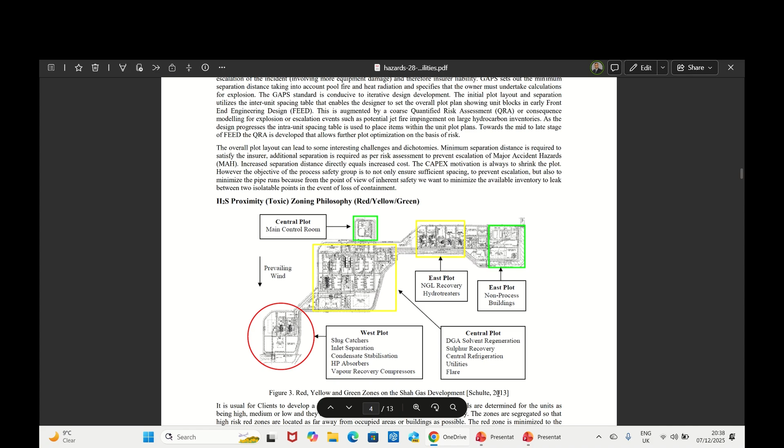So we will read through these sentences and then try to understand. It says that the Global Asset Protection Services, GAPS, used by the insurer, usually sets a minimum separation distance to be applied in the facility. The driver here is to minimize equipment damage and escalation of the incident, and therefore insurer liability. GAPS sets out a minimum separation distance, taking into account pool fire and heat radiation, as well as that the owner must undertake calculations for explosion.

So basically, this is the same thing I was talking to you guys about, that there are systems where they talk about minimum gaps, some 10 to 30 meters distances, and this one says that this is augmented by a quantified QRA or consequence modeling for explosion and/or escalation events such as potential jet fire impingement on a large hydrocarbon inventory.

As the design progresses, the intra-unit spacing table is used to place items within the unit plot plans. Towards the mid to late stage, the QRA is developed that allows further plot optimization on the basis of risk. So you can see that this talks about QRA keeping the distance away, and it talks about different aspects of QRA at different stages of engineering.

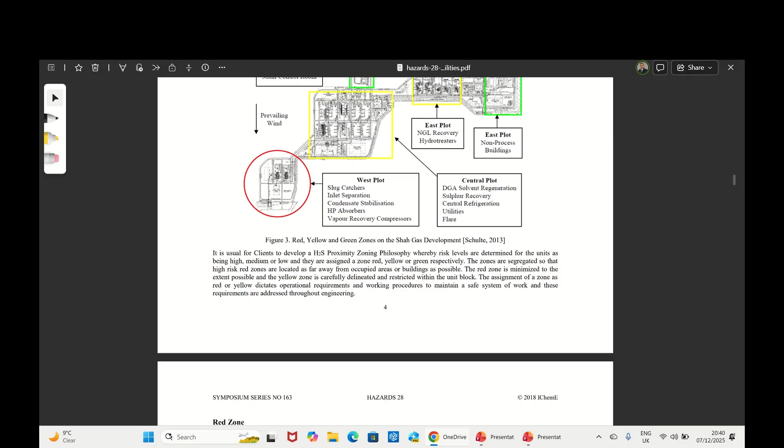So the following pages are talking about different zones, what is the meaning of each zone. So let's have a look at this aspect as well. It is usual for the client to develop a proximity zoning philosophy whereby risk levels are determined for the units as being high, medium, or low, as they are assigned the zone red, yellow, or green respectively.

The zones are segregated so that high risk red zones are located as far away from the occupied buildings as possible. The red zone is minimized to the extent possible, and the yellow zones are carefully delineated and restricted within the unit block. The assignment of the zone as red or yellow dictates operating requirements and working procedures to maintain a safe system of work, and these requirements are addressed throughout engineering.

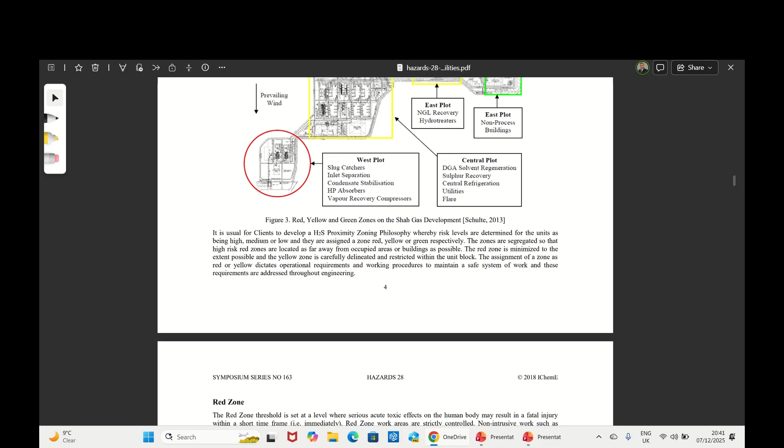So as it is clear, the prevailing winds are there, the proximity of H2S, and then accordingly you define the zones based on the hazardous conditions and the presence of hazardous material, which are red, yellow, and green.

So we just go through the red zone, what exactly it means, and then we will explore more aspects. A red zone threshold is a set level where serious acute toxic effects on the human body may result in fatal injury within a short time frame. Red zone work areas are strictly controlled. Non-intrusive work such as security and operator inspection may be conducted with a mandatory requirement for personnel to carry an H2S detector. So basically, these are the areas where high fatality can happen in case of exposure.

So, anyways, I am not going into all this breathing system and PPE required, but prima facie these are the zones where exposure can lead to the immediate death of the person. So that's why it is classified as a red zone.

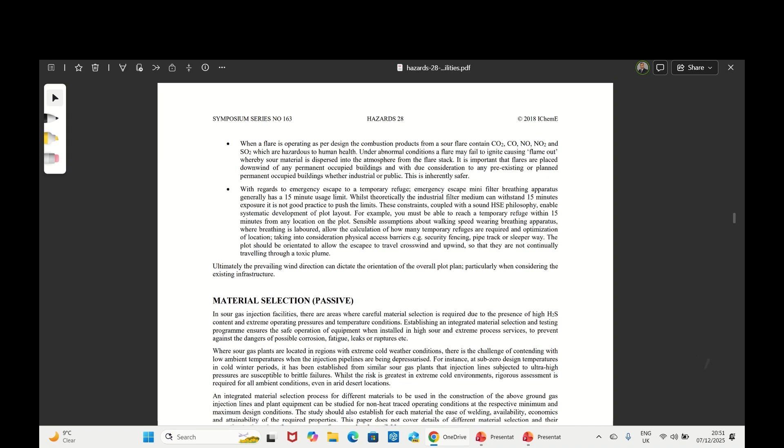So basically, I'm not going to detail this explanation, but what I understood is that the plot plan layout should be such that your emergency exit is in a location which is more approachable to the people who are working in the plant and who are in the control room or the buildings where the offices are.

Plus, the location of these buildings should be upwind and the flare should be downwind, so that in case of flame out or any other reason where the flare has extinguished, the dispersion takes place and the toxic gases are not in the periphery of the operating plant. They're dispersed away from the plant periphery or premises.

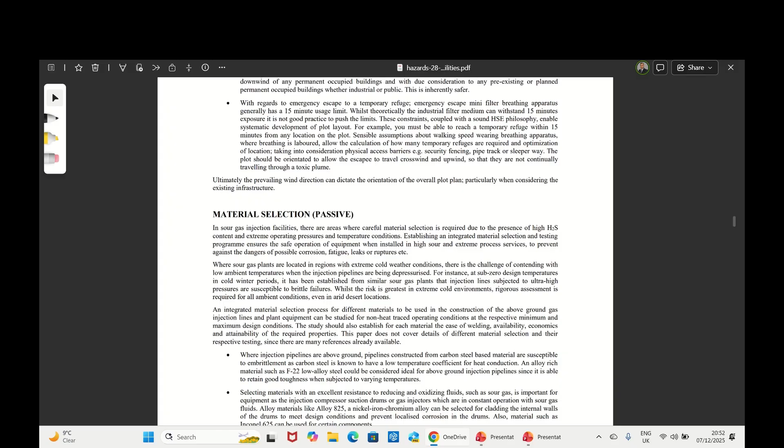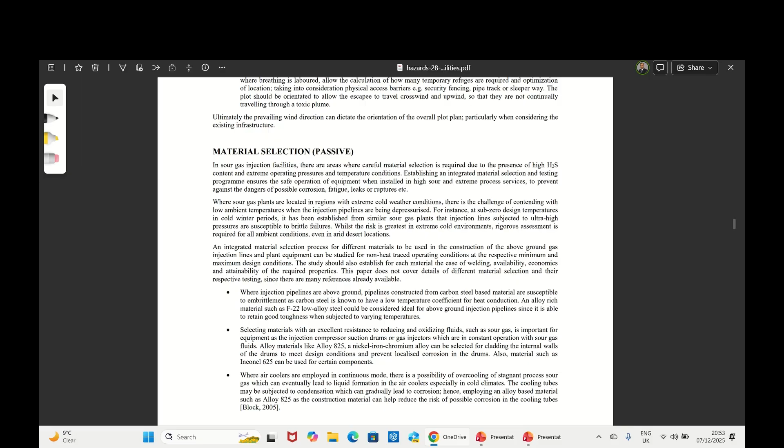So material selection is also a kind of passive inherently safe design, which means that you should follow a material which is compliant with sour service and which has proper coating. Suppose it is a sour facility, then we go for duplex or CS with some kind of coating for the equipment. So we will see in detail what it says. We will read this passage through, and then we will analyze it.

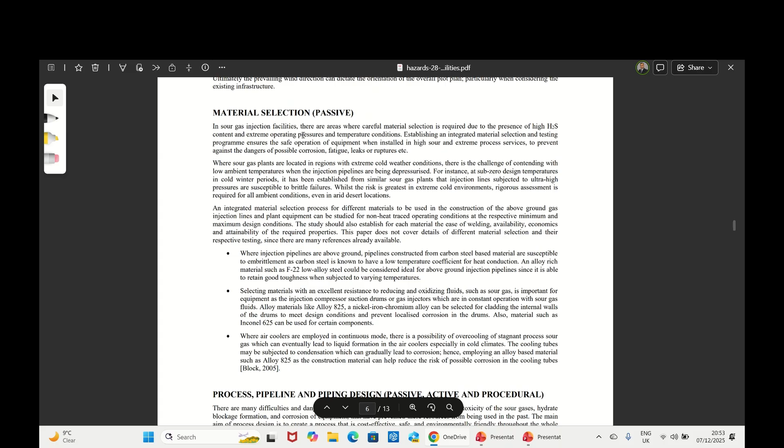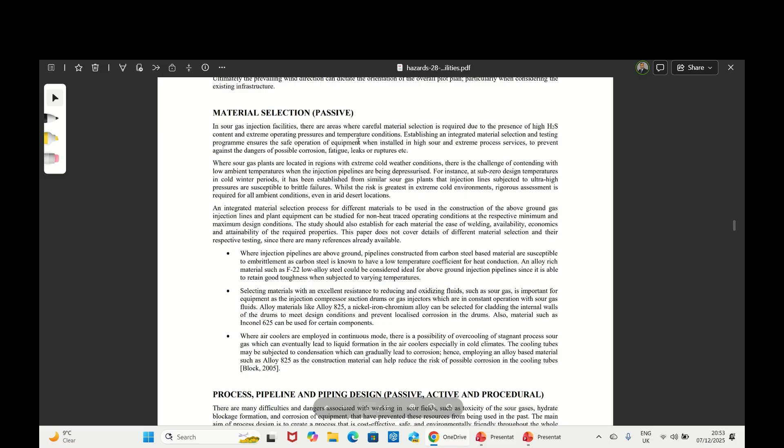Okay. What it says is that in a sour gas injection facility, there is an area where careful material selection is required due to the presence of high H2S content and extreme operating pressure and temperature conditions. Establishing an integrated material selection and testing program ensures safe operation, which is why I said just now that proper selection of material is required for the ultra sour or sour H2S concentration, which is done by the piping material guys to develop a piping material specification.

And what happens is aqueous H2S can create SSC, which is also called sulfide stress cracking, and hydrogen embrittlement, which is not good for SS material. So we go for duplex or some kind of epoxy-lined CS materials.

So let's go to some bullet points. What it says is that where the injection pipelines are above ground, pipelines constructed from carbon steel based material are susceptible to embrittlement, as carbon steel is known to have a low temperature coefficient for heat conduction, and alloy rich materials such as F22 low alloy steel should be considered ideal for above ground injection pipelines, which are able to retain good toughness when subject to varying temperature.

So one of the aspects very nicely explained is selecting material with excellent resistance to reducing and oxidizing fluid such as sour gas. It's important for equipment such as injection compressors, suction drums, and gas injectors, which are in constant operation with the sour gas fluid. Alloy material, nickel alloy, chrome alloy can be selected. So they are going for alloy material, then cladding of internal walls of the drums to meet design conditions and prevent localized corrosion of the drums. Also, materials such as Inconel 625 can be used for certain components. So very much they say that they're not going for SS, rather they're going for alloy material.

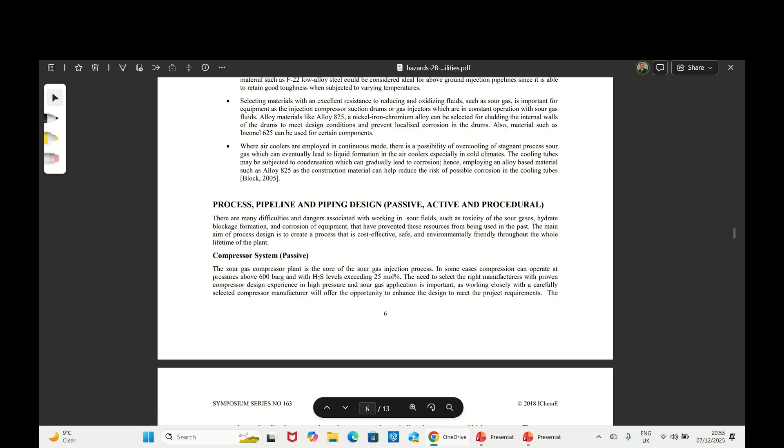Air coolers are employed in continuous mode. There is a possibility of overcooling of the process sour gas, which can eventually lead to liquid formation in the air coolers, especially in cold climates. The cooling tubes may be subjected to condensation, which can gradually lead to corrosion. Hence, employing an alloy-based material such as alloy 825 as a construction material can help reduce the risk of possible corrosion in the cooling tubes.

So you can see that it's very clear that a proper material selection diagram, or we call it MSD, should be developed in consultation with the process engineers, and they can tell us how much stress concentration is there. Accordingly, material can be selected.

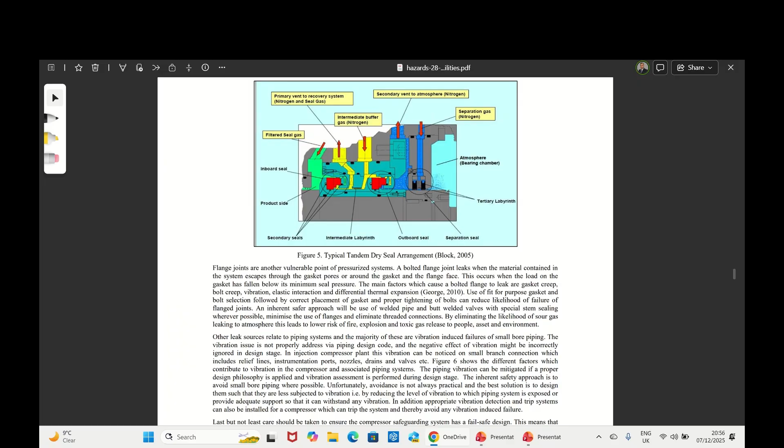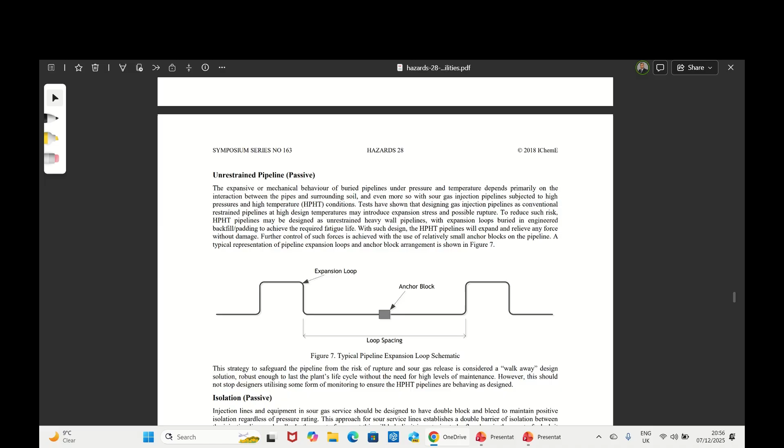So this section talks about process pipeline and piping design, passive, active, and procedural design, and we will dig into this one: compression system, which is passive, leak path minimization, passive, and it talks about compressor seal, then unrestrained pipeline, loop spacing, all passive; isolation, hard pipe venting, flaring, overpressure protection are active ones; hydrate and corrosion is active; enhanced smart pigging or pipeline inspection is procedural; moisture analysis and wet condition is procedural, breathing air system procedural.

And practicalities of achieving innovative safer design. We will come to this checklist and all these things slowly, and then we will read through the conclusion. So let's go back to a system where it explains some of the passive, active, procedural innovative safe design activities, and slowly we will try to understand this.

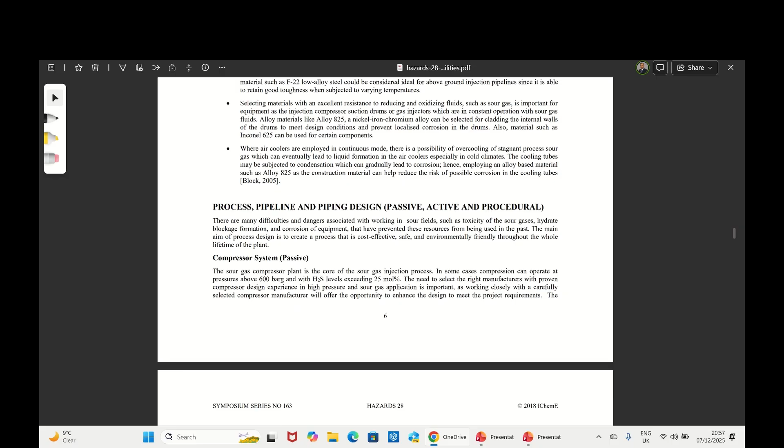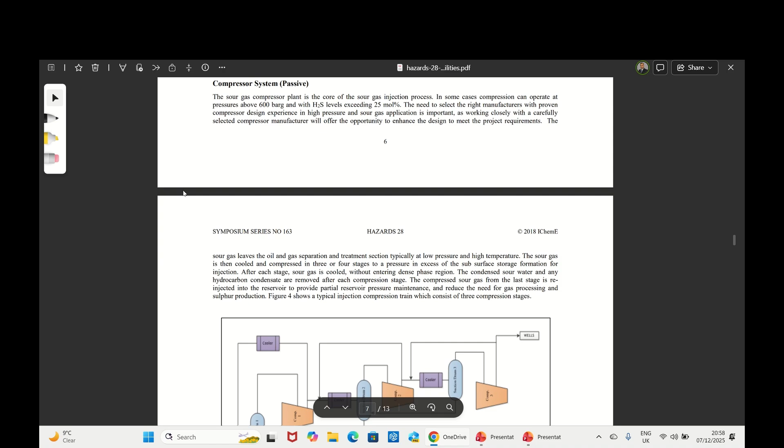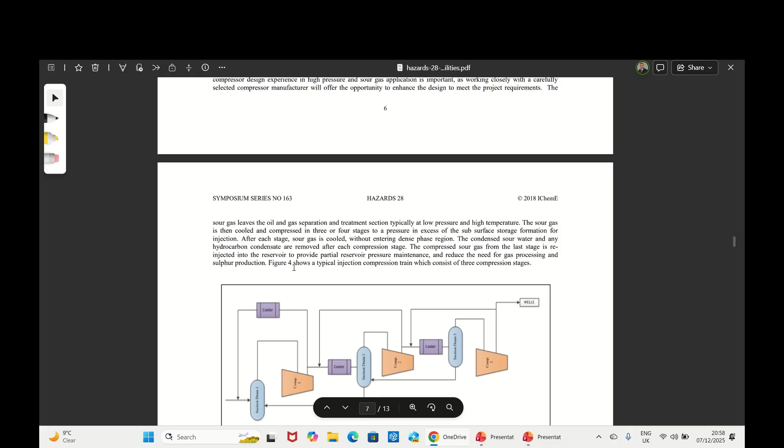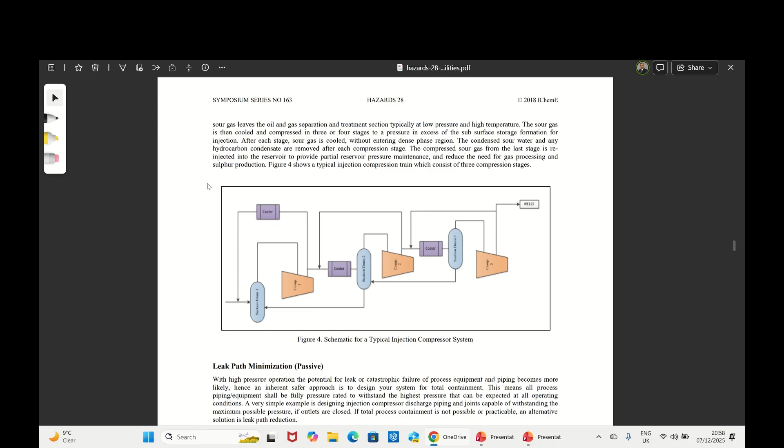So what it says, the compressor system. The sour gas compressor plant is the core of sour gas injection. In some cases, the compressor can operate at pressures above 600 bar gauge with H2S levels exceeding 25 mole percent. The need to select the right manufacturer with proven compressor design experience in high pressure and sour gas applications is important. So they're saying that you should select the right compressor type, the seal system, proper metallurgy where the condensation happens. So this is what we understood from this compressor system.

Then leak path minimization, which means that with high pressure operation the potential for leaks and catastrophic failure of process equipment and piping becomes more likely. Hence, the safer approach is to design your system for total containment. There should not be loss of containment. Total containment should be there. This means all process piping and equipment shall be fully pressure rated to withstand the highest pressure that can be expected at all operating conditions.

So a very important thing is that you should design your system with full pressure rating. You can see that it says design your system for the full pressure rating, the highest pressure that can be expected for all operating conditions. So very nicely told that it should be expected for all operating conditions.

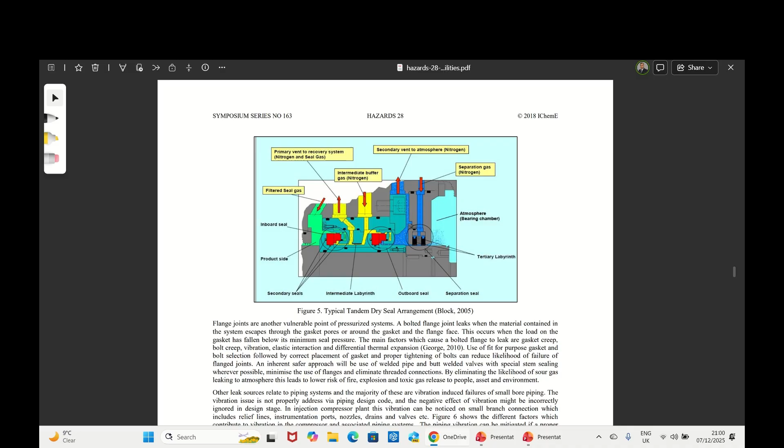A very simple example is designing injection compressor discharge piping and joints capable of withstanding the maximum possible pressure if the outlet is closed. So you can see the full rating of the piping and the compressor components, so that it does not lead to loss of control in case of a blocked outlet. Then it talks about improved seal design.

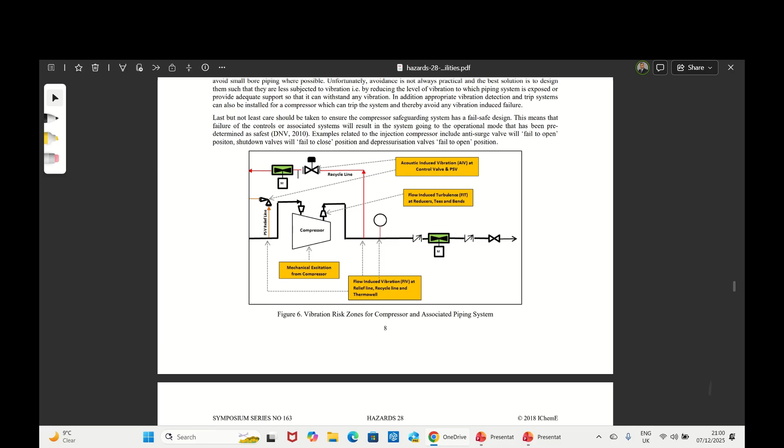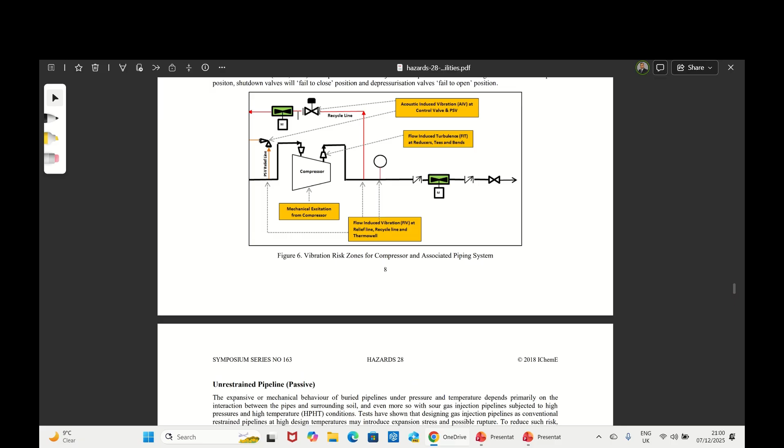So this chapter talks about acoustic induced vibration or AIV, up to the examination of components like PSVs, so that there is no stress on the line and there is no vibration or AIV induced stress on the pipe components, which can lead to loss of containment or breaking of the flanges.

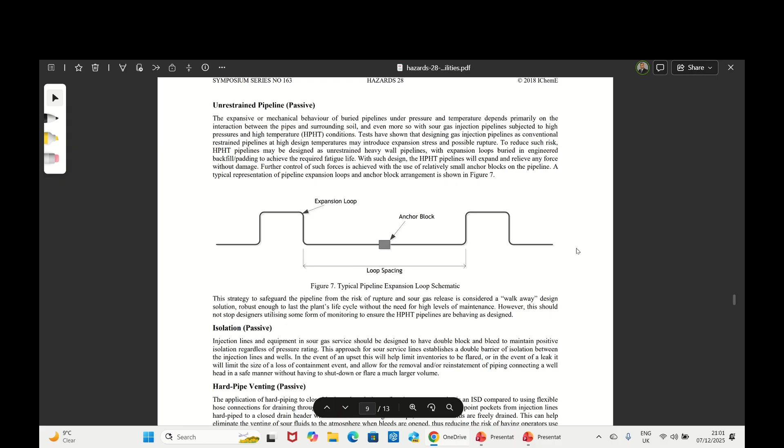So it talks about typical expansion loops for temperature differences. In case of thermal expansion, proper expansion loops should be provided so that there's no stress on the line, and it is one of the best designs for avoiding stress on the pipes.

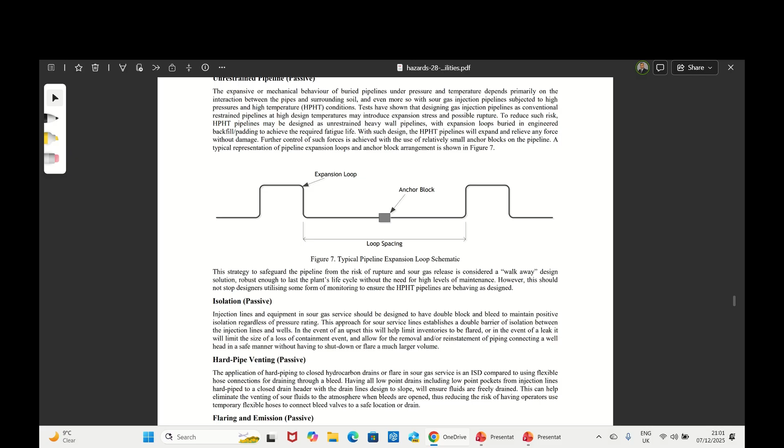Okay, so it says that to reduce such risk, high pressure, high temperature, they call it HPHT, can subject to high pressure and high temperature conditions. Let's read through this one. The expansion or the mechanical behavior of the buried pipeline under pressure and temperature depends primarily on the interaction between pipes and surrounding soil, and even more so with the sour gas injection.

So tests have shown that designing the gas injection pipeline as a conventional restrained pipeline with high design temperature may introduce expansion stress and possible rupture. To reduce such risk, a high pressure, high temperature pipeline may be designed as an unrestrained heavy wall pipeline with expansion, buried in engineered backfill or padding to achieve the required fatigue life.

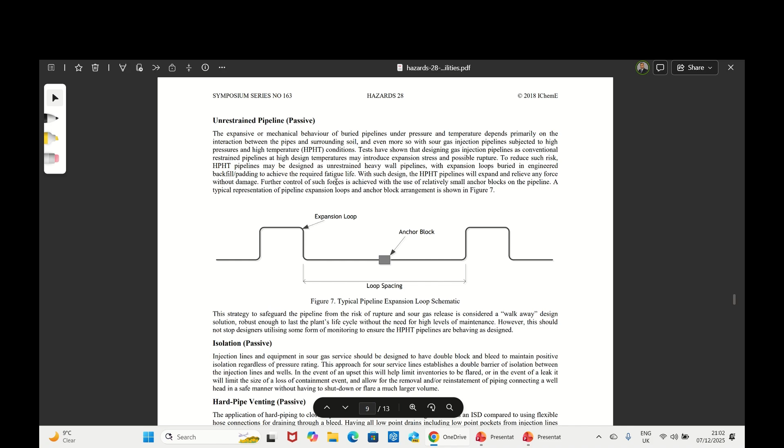So it talks about pipeline design, isolation, like you should provide proper sectionalization valves, fireproofing should be there so that you can isolate a system which is prone to leak or which has caused fire. Hard pipe venting talks about proper hard pipe hydrocarbon drains or flare in sour gas service should be provided through the bleed, having all low point drains including low point pockets from injection lines, hard pipe to the closed drain header. It talks about hard piping, flare, that a proper flaring system should be there, and proper disposal of toxic gases should be there through burning or incinerating.

Okay, so it talks about purging and inerting the system for the maintenance and all these things. Overpressure protection active, like HIPPS, talking about HIPPS system, talked about SIL certified system, hydrate and corrosion. That system should be designed to tackle hydrates or corrosion, like using alloy system for avoiding corrosion. Smart pig pipeline inspection. So now we have seen the active ones, which is hydrate or corrosion. So water condensation and hydrate formation are serious ones, and that's why we have to design our system above the dew points actually.